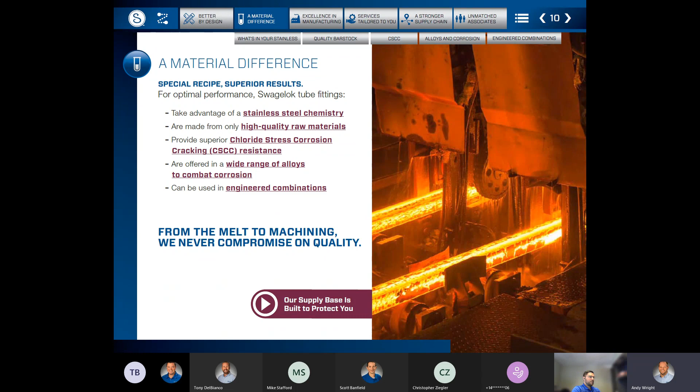So, you can have the best design, the best engineered product, but if you're not using the top of the line material to produce that, you can have subpar results. So at Swagelok, we'd like to say that everything starts with the melt.

So, as mills and stainless steel manufacturers have gotten better at dialing in the requirements of the elements that constitute stainless steel, they have tended to the lower ranges of the percentages for things like chromium and nickel. Swagelok, on the other hand, has maintained 17% chromium and 12% nickel, and this is going to lead to enhanced corrosion resistance and ductility of the stainless steel. So again, this is another issue of not sacrificing quality for cost.

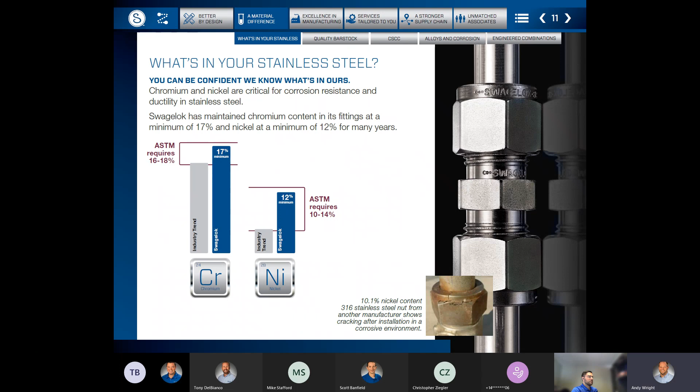And so Swagelok is such a large buyer of stainless steels that we run batches from our approved mills that are unique to Swagelok. So Swagelok stainless steel cannot be purchased by anybody else. So when we go back to the interchange intermix, there is no other company, no other manufacturer that is able to use the Swagelok stainless steel.

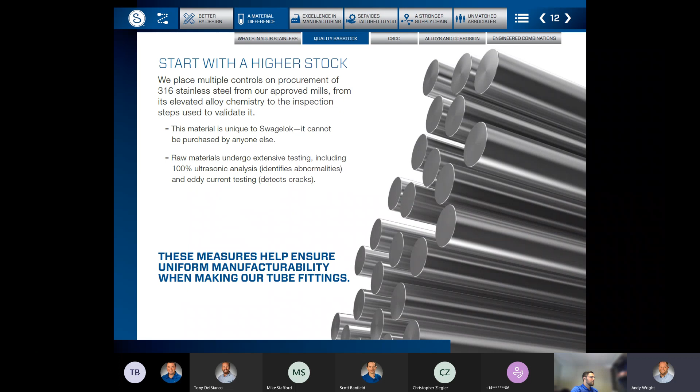So we put a bunch of controls on our suppliers in the procurement process, and then we also undergo a tremendous amount of testing when it comes into our receiving. So we do 100% ultrasonic testing. And so this just helps ensure the uniform manufacturability when we're making up our tube fittings.

And this highlights some of the material and some of the testing. So chloride stress corrosion cracking, it happens. No stainless steel is immune from that, but through some testing procedures and the material that is employed in the Swagelok stainless steel, they did a lot of testing and none of the Swagelok nuts cracked or leaked, while 39% of other nuts cracked, and 2.7% leaked. So you can kind of see the picture down there below of what 700 plus hours of a test environment does to other stainless steels.

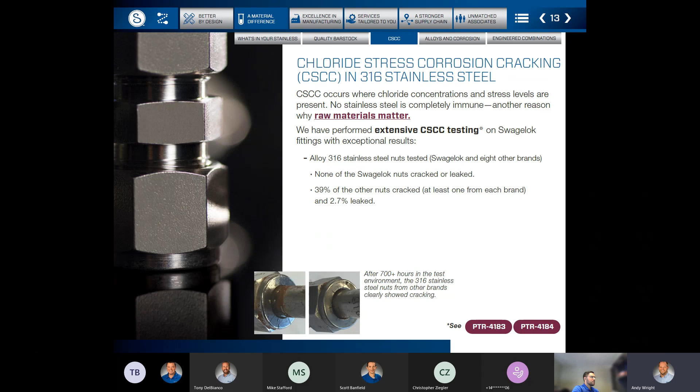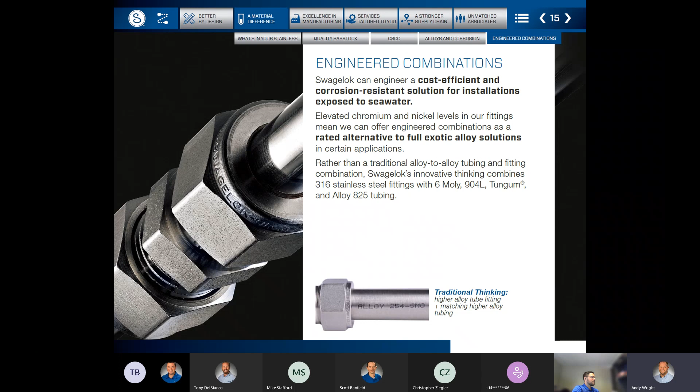And with that in mind, Swagelok offers a wide array of alloys to combat corrosion. So just know that there are other options available. And then there are also combinations of those alloys that we have tested, engineered combinations that we can employ to make sure that there is not a lot of corrosion cracking. And some of these are specific to seawater, but they can be applicable to other applications.

So now moving into tying together some of the design, some of the material into the manufacturing process. So what's important here is that Swagelok owns the manufacturing process from start to finish. We forge, we machine, we electropolish, we weld, we assemble. We invest a lot into the machines that we use, always concerned about total cost of ownership of those machines in order to minimize the errors.

And then also Swagelok has a tool shop in the manufacturing center, so we maintain the tools that are there as well. So that is able to achieve the super tight tolerances that we keep. We also have a robust reliability excellence program, and this leads to traceability at all phases of the process as well, and that enables us to stand behind our limited lifetime warranty.

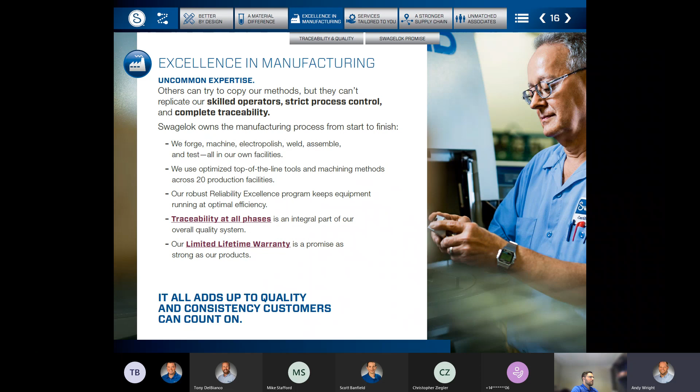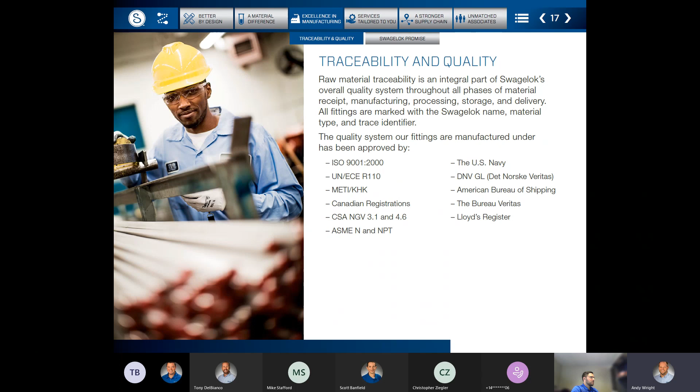So just know that a unique identification code is assigned to a heat of each material, and this information is maintained throughout the manufacturing and assembly process. It allows us to track the material that makes up a part and which components are in an assembly. And so we've been approved by all these quality systems that are listed here.

And through all this, we are able to stand behind the Swagelok limited lifetime warranty, and that is the best in the industry. We have been honoring the same warranty for over 70 years. It says that if there's a defect of material or workmanship, we'll not only replace the product, but also the installation of that product. I know personally that I've been involved in a couple product evaluations, and Swagelok does an excellent job of doing good research and lab analysis to determine what the root cause of a potential failure is, to make sure that the remedy is accurate.